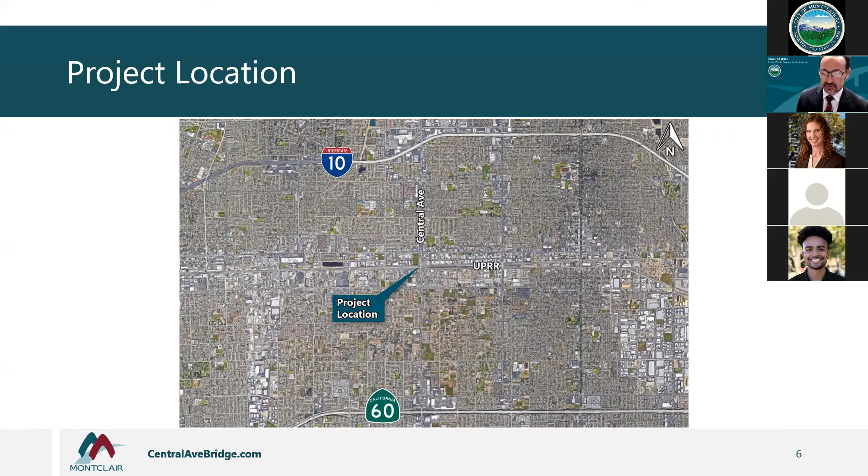The bridge spans Union Pacific Railroad and State Street. There are many challenges and logistics to overcome during construction. So BKF is preparing a complete construction project that keeps our residents in mind, minimizes the inconveniences, provisions for traffic concerns, and provides for alternate routes for the commuting public. With that, I will turn it over to Eric with BKF to provide more details on the description of the improvements and how we'll accomplish them.

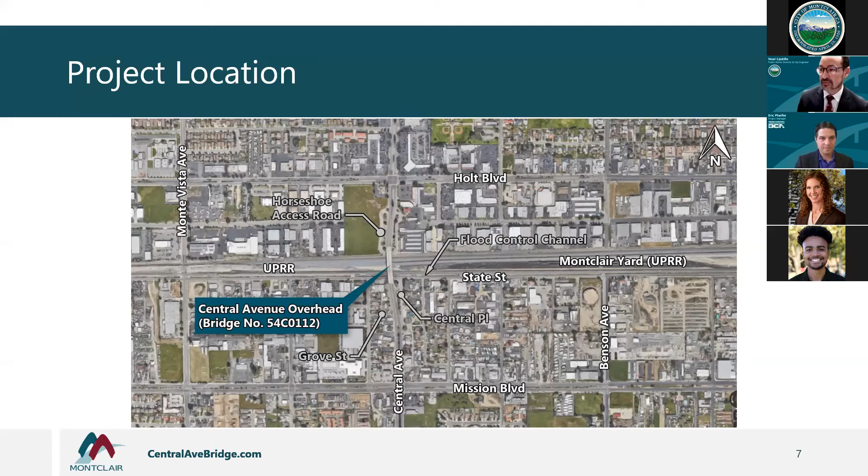Thanks, Noel. So as Noel mentioned, Central is a really critical route for the city. It's one of the principal arterials in the city, and it connects to State Route 60 to the south and I-10 to the north. The existing bridge has 4 travel lanes separated by a raised median, a sidewalk on the east side only, and no designated bike lanes.

Safety has really been a concern along this segment. There's been at least 19 accidents reported since 2014. And because of the vehicle congestion too, there's been delays in emergency vehicle response times. So this project seeks to address that.

Central carries roughly 31,000 vehicles per day, and it's really close to the county threshold for a 6-lane segment, which is 31,100. So 100 additional vehicles, and we need a 6-lane facility. As growth continues in the region, Central will certainly need to be a 6-lane facility. And we should also note that the segments both north and south have 6 lanes, so this segment creates a bit of a bottleneck.

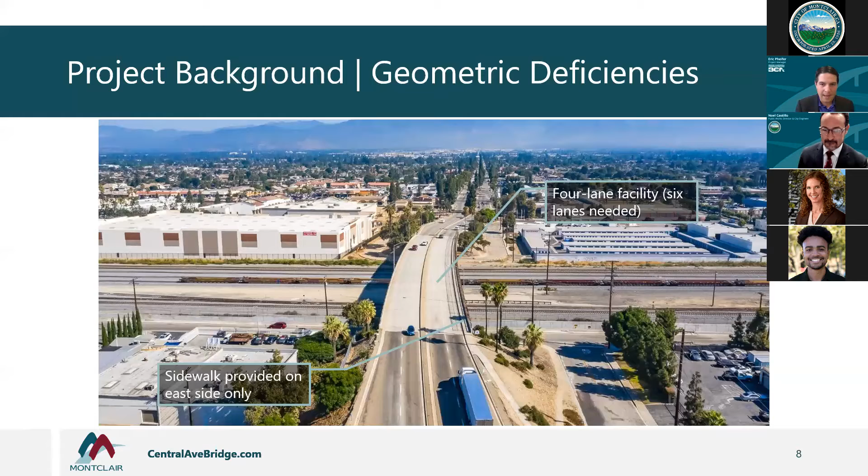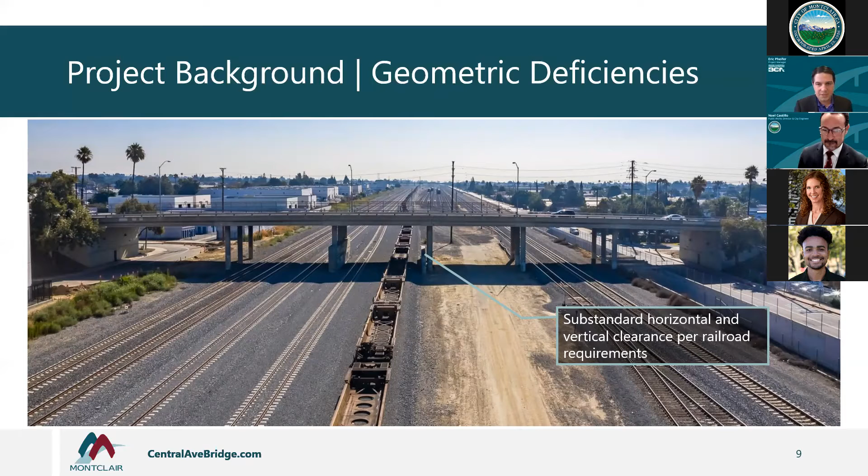Along with the roadway deficiencies, the bridge also has some deficiencies with respect to the railroad. Union Pacific Railroad, Amtrak, and Metrolink all have clearance requirements that are currently not met by the existing bridge, which this project will address. The minimum vertical clearance the bridge provides is about 23 feet; 23'4" is desired. Also, the bridge supports are located in close proximity to the tracks.

The bridge was built in 1967. Typically, bridges have a lifespan of about 75 years, so this bridge is nearing the end of its design life and requires rehabilitation or replacement. Bridges are typically inspected every two years and receive a sufficiency rating based on elements like the deck and columns. Based on the most recent inspection, this bridge has a sufficiency rating of 45.2 out of 100. The condition of the deck prompted this bridge being rated as structurally deficient.

Under the Highway Bridge Program, administered by a branch of Caltrans called Local Assistance, bridges are eligible for federal funding if they have a sufficiency rating less than 80 and a structurally deficient flag. So this bridge is eligible and is funded by the Highway Bridge Program.

All this being said, don't let this alarm you. The bridge is certainly safe for continued operation. The structurally deficient flag and the low sufficiency rating are just indicators that this bridge should be prioritized for replacement, but they don't indicate any imminent danger. Along with addressing the structural issues, this project will also seek to improve the vertical clearance to 23'4".

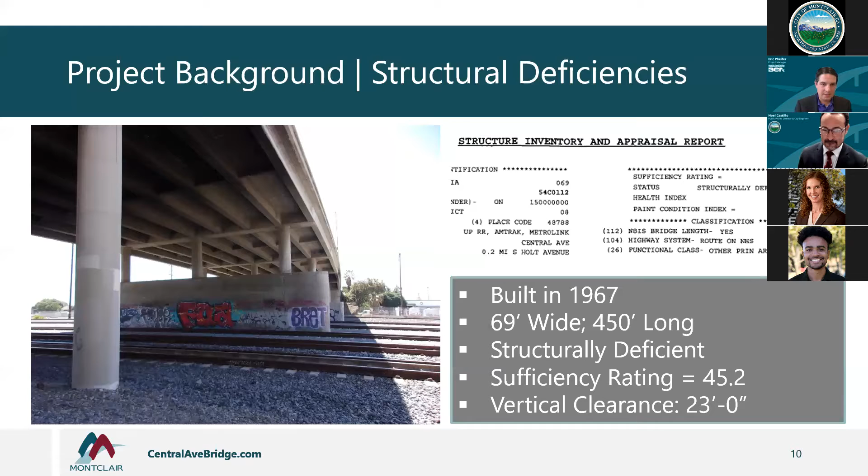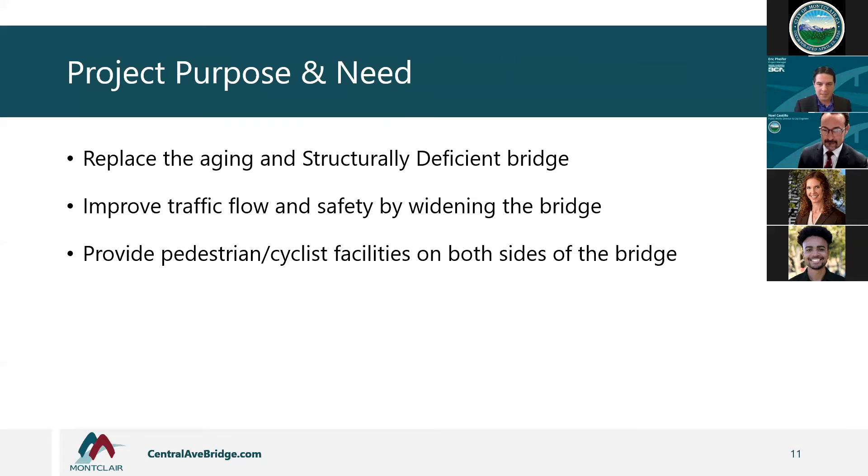So the purpose of this project is to address the deficiencies I just mentioned by replacing the aging and structurally deficient bridge. The city evaluated rehabilitation and replacement options, and replacement was the preferred option. This will help improve the state's infrastructure report card. We'll also be able to improve traffic flow and safety by widening the bridge, reducing vehicle congestion, and providing dedicated pedestrian and cyclist facilities on both sides of the bridge for improved access and safety.

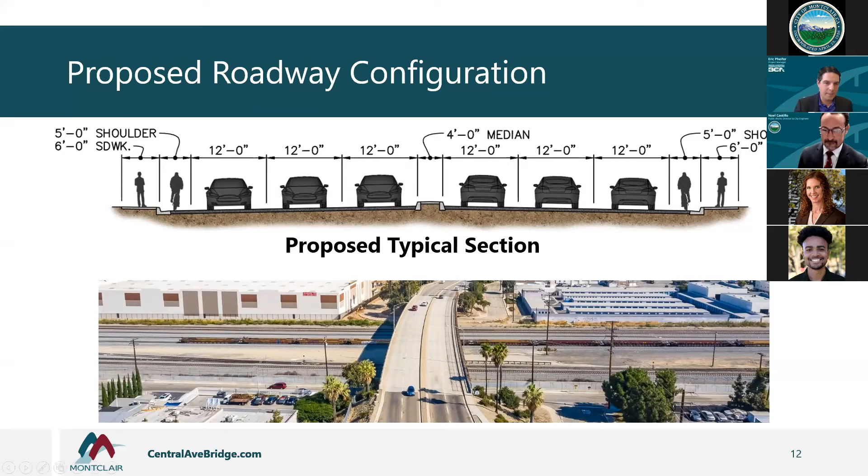This shows the typical roadway section on top compared to the existing configuration on the bottom. We're providing six travel lanes, three in each direction, separated by a raised median. There will be Class 2 bike lanes in the shoulders going both northbound and southbound, and sidewalks on both sides. Along with the sidewalk on the east side, there will also be a sidewalk on the west side to serve the businesses and residents along the west side of Central Ave.

For the proposed bridge type, the city and design team evaluated a number of steel and concrete bridge options, and we arrived at a type called a haunched steel girder bridge. For this type of bridge, the depth varies along its length, meaning that instead of raising the roadway profile significantly and building taller embankments, we can keep the roadway almost where it is today. Typically, when you go to a longer span with fewer supports, you'd need a deeper structure to maintain vertical clearance, which would impact residents and businesses. By using this structure type, we're able to limit impacts to adjacent businesses and residents by maintaining the roadway profile as it is today.

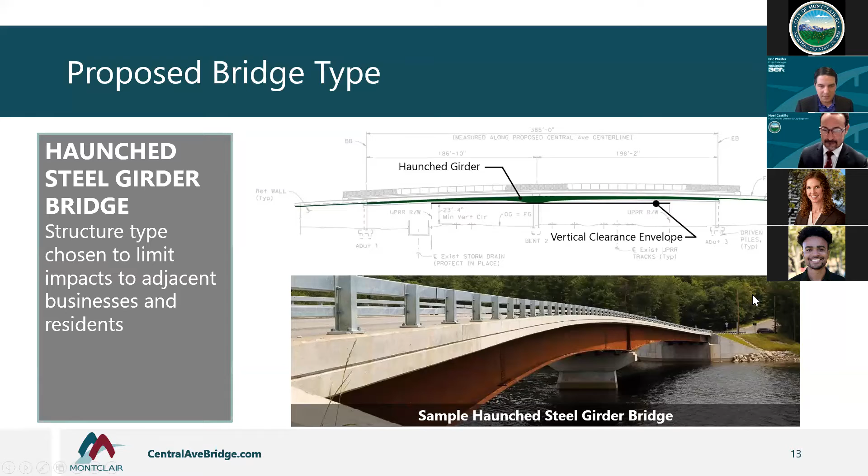The picture on the bottom shows a sample of this structure type, but that one is over a waterway. You can imagine Central Ave will be similar, except it will be over a railroad instead of a waterway.

The bridge will be supported on cast-in-drilled-hole concrete piles. This is important because it has a lot of noise benefits for adjacent businesses and residents. You may have seen a project on the freeway where driven piles are used, which involves dropping a hammer to pound a pile into the ground—that can be very noisy. This type of pile, a cast-in-drilled-hole pile, is drilled and augured into the ground, so during construction there will be quite a bit less noise compared to other foundation types.

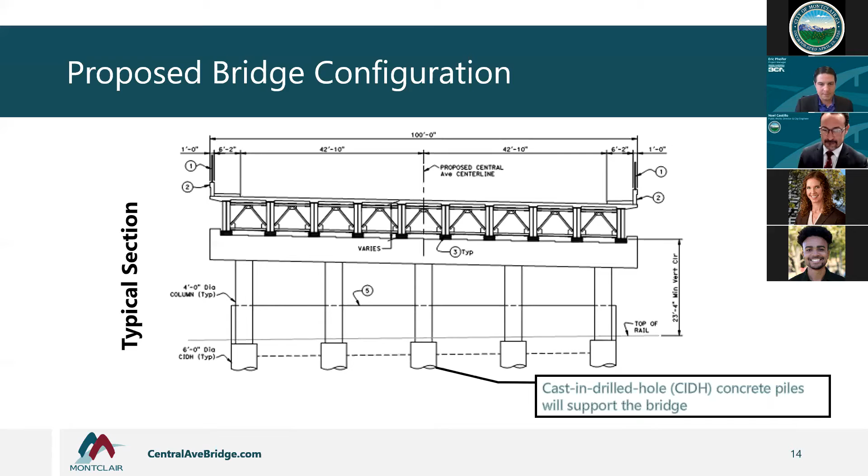The existing bridge has a number of supports within the railroad right-of-way. This one will just have one support right in the middle, and then two supports or abutments on either end. The south abutment will be just south of State Street, and the north abutment will be just north of the horseshoe access road that loops underneath the bridge, similar to how the bridge is configured today.

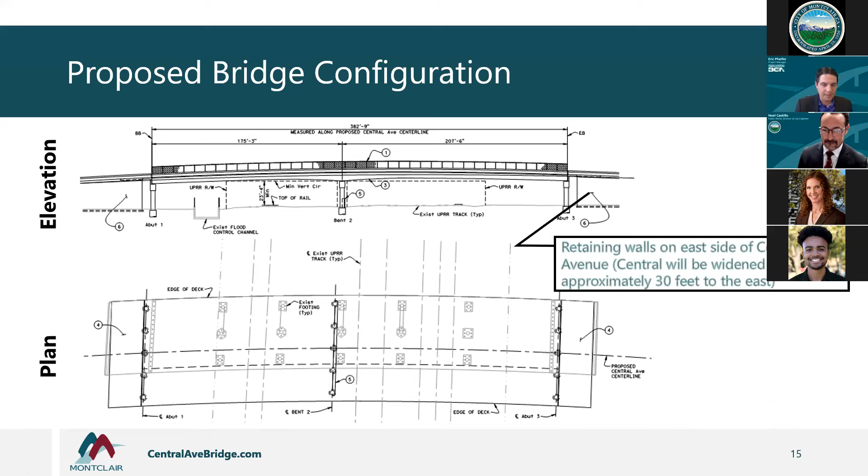There'll also be retaining walls located on the east side of Central Avenue. We're keeping the west side where it is today, and widening to the east about 30 feet. So we'll be installing some retaining walls to preserve the local roadways like the Horseshoe Access Road and Central Place.

If we click, you'll see a rendering of the proposed bridge here. So here we've got a proposed 6-lane facility with sidewalks and bike lanes on both sides, and a single support within the railroad right-of-way that may require a crash wall to be crash protected. This would meet all of the roadway and railroad standards and provide a wider 6-lane facility.

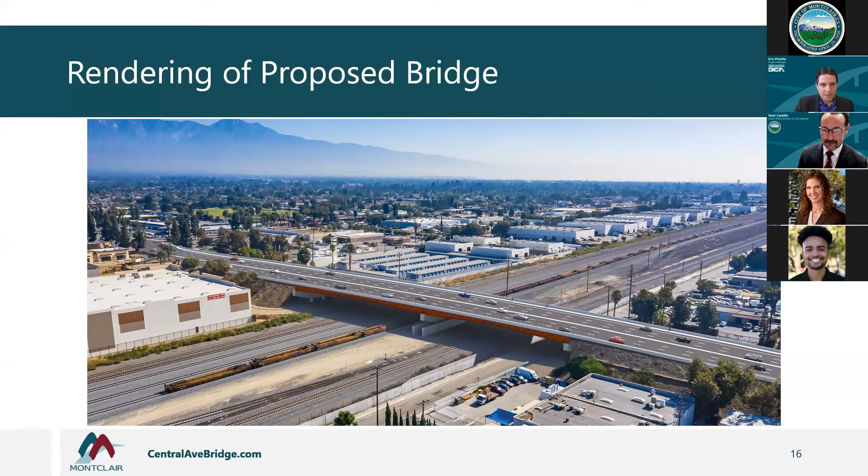The next key component I wanted to discuss tonight is how we're going to stage construction in order to maintain traffic on Central Avenue at all times. We think maintaining at least one lane of traffic in each direction is key here.

We're currently in the environmental phase of the project. Projects of this type need to comply with the California Environmental Quality Act. And because it's federally funded, it also needs to comply with the National Environmental Policy Act, or NEPA.

Under both CEQA and NEPA, the project is categorically exempt because it removes a bottleneck by matching the 6-lane configuration of the roadway to the north and south, and it's a replacement of existing infrastructure. Compared to a new development or a new bridge, which may require an environmental impact report, this process is a bit more streamlined using a categorical exemption.

Along with the categorical exemption, we're preparing a number of technical studies to evaluate potential impacts from the project. Those studies include noise and air quality reports, historic property and archaeological resources, and looking at hazardous waste, or what's called an initial site assessment.

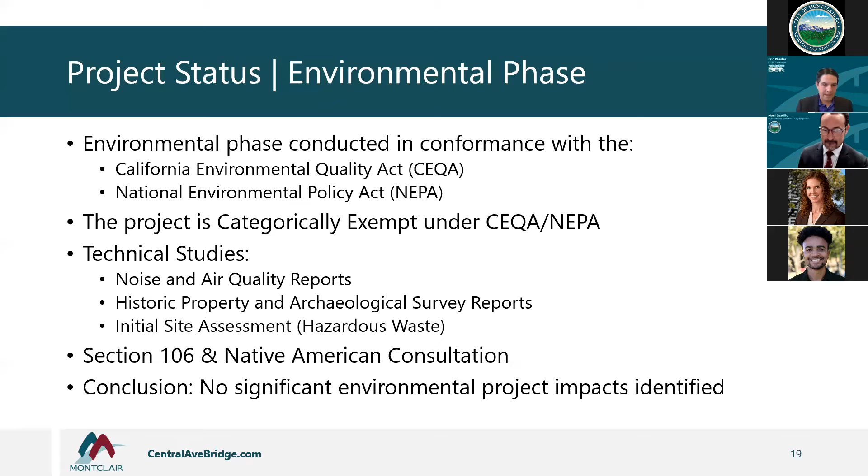Caltrans also consulted Native American groups, and the findings of all these consultations and technical studies are that the project is not expected to have any significant environmental impacts. So we're close to concluding this phase, and we expect to receive environmental approval within the next few weeks.

This project will also require the right-of-way phase. There'll be some property acquisitions required in order to construct the project, and those may include roadway easements for the widened portion of Central Ave, temporary construction easements, or TCEs, for the construction of retaining walls and sidewalk improvements, and utility easements for any underground and overhead utility relocations that need to be relocated because they're in conflict with the project.

For those properties that are impacted by the project, the city is going to notify the property owner about the easements necessary to construct the project. An appraisal will be prepared, and an offer of just compensation will be provided to the property owner in order for the city's contractor to use the property.

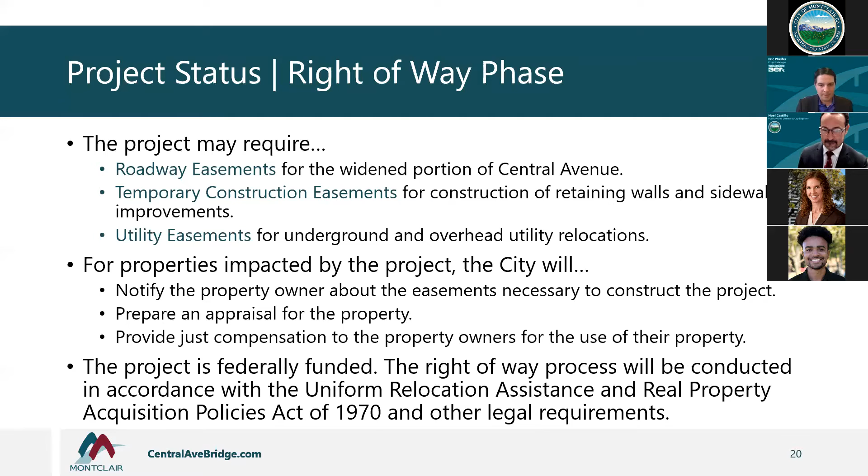Since the project is federally funded, the right-of-way process will follow the Uniform Act. Many projects that are federally funded have required right-of-way and have undergone this same process, so it's very defined in terms of how the appraisal should be conducted and how the property owner is compensated for their property.

So the next steps of the project are to complete the environmental phase. We're very close on this and expect to receive environmental approval within the next few weeks. Following that, we'll initiate the right-of-way phase.

The city intends to procure a right-of-way consultant who will work with affected property owners to prepare appraisals and offers of just compensation. Along with the right-of-way phase, we'll be preparing plans, specifications, and estimates in the final design phase that the city can use to procure a contractor to build the project.

The design phase, the right-of-way phase, and the environmental phase are all funded, but funding has not yet been secured for construction. We have some funding identified, and the city is working with Caltrans local assistance to allocate highway bridge program funding for construction. But in the meantime, we may be looking for other state, local, and federal funding sources in order to get this project into construction in late 2022.

So depending on funding availability, we're looking at starting construction at the end of next year. Throughout this process, through all these phases, we will keep you in the loop and conduct additional public outreach meetings. And if you want more information on the project, I'll turn the presentation back to Stacy to let you know how to stay involved.

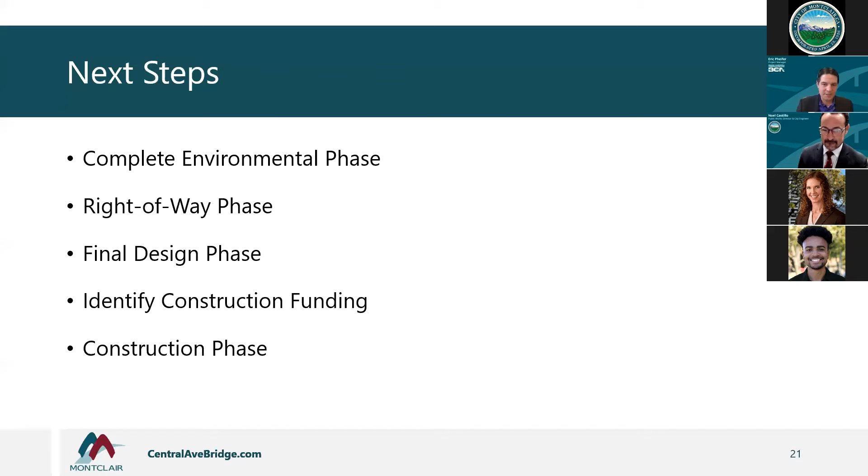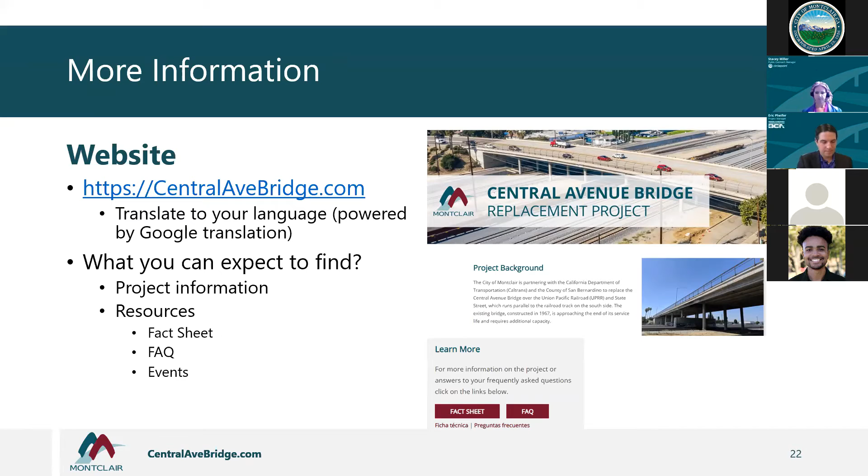Thanks, Eric. So we have a project website available with more detail on the project, as well as some resources you could download and take advantage of. The website does offer Google Translate to easily translate to an appropriate language—a great feature there. We also have the project fact sheet that has the project overview and details, including the schedule and contact information for Noel Castillo to gain more insight into the project.

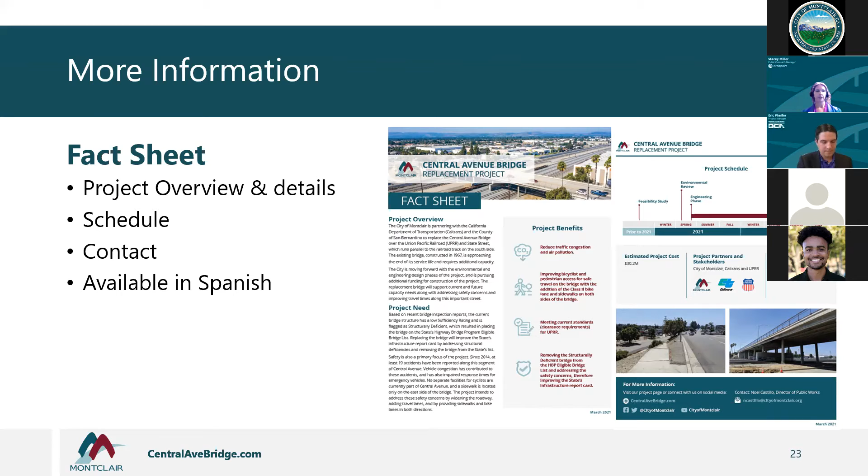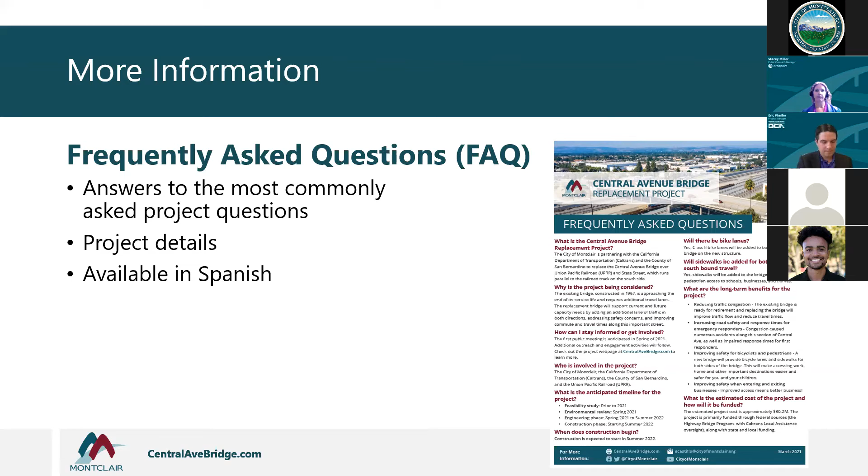The frequently asked questions, or FAQ document, is also available on the website, and you can download it. Both the fact sheet and the FAQ documents are available in Spanish on the website.

For all of those interested attendees who want to stay informed and be part of our project updates, you can go ahead and submit your contact information, including your email address, on the project website. If you want to be added to the email list, add a note into the comments that you're interested, and we'll keep you updated and abreast for future public events, as well as any email notifications we send out with updates on the project.

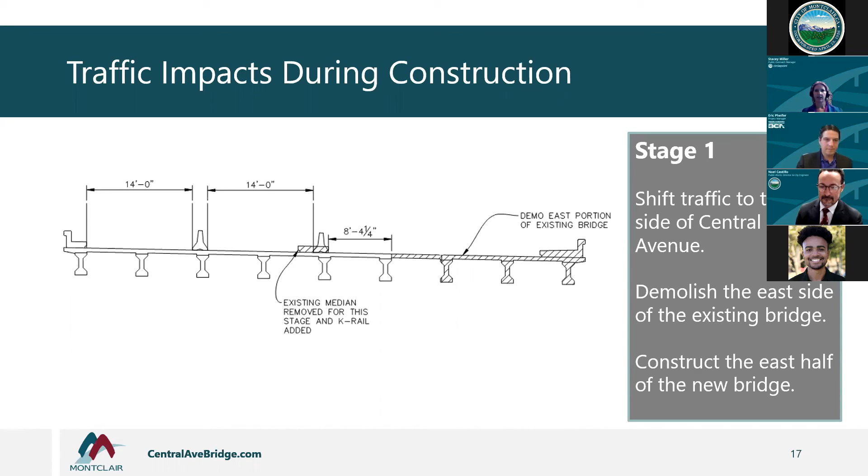Another question: why are you prioritizing this project now when projects on the I-10 and Monte Vista are still in progress? We prepare a traffic management plan that also considers any ongoing adjacent projects. The analysis as part of that report may result in temporary upgrades to intersections outside the project limits, not just Central and Holt or Central and Mission. These intersections may be temporarily upgraded to keep traffic flowing throughout the city, including modifying signal timing or striping dedicated turn lanes. Even with big regional projects ongoing, our goal is to make adjustments at intersections to keep traffic flowing citywide.

Another question: shouldn't this project be undertaken in phases after COVID-19? By the time we get into construction, hopefully the pandemic will no longer be an issue. What's important is that once funding is identified for a project, it's important to use that funding. Right now we have Highway Bridge Program funding, and if we're successful pursuing grant applications for other federal, state, and local funding, that often comes with a deadline. So it's important to use it as soon as it's available.